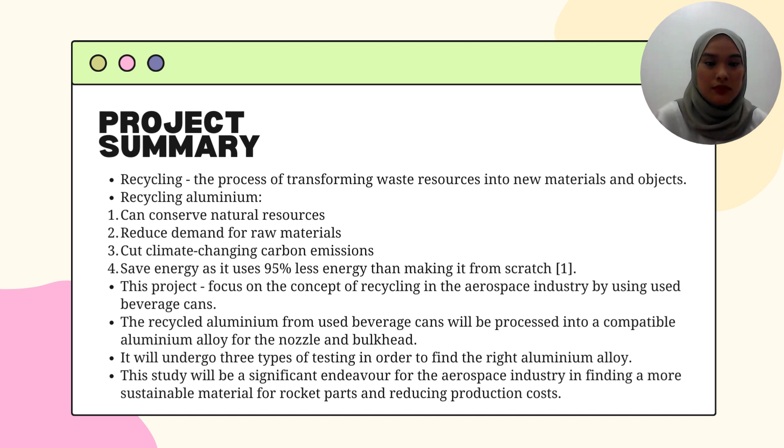Metals is one of the elements that is widely used in the aerospace industry, which is a non-renewable source. Non-renewable metals include copper, tin, lead, aluminium, gold, silver, and other elements. Steel is also manufactured from a non-renewable source, which is iron. Over time, metal demand will increase and supply will be depleted as they are non-renewable resources.

Used beverage cans are a type of aluminium scrap that can be recycled within the whole recycle loop of its original product. It was first developed in America and is now used worldwide. With this, we want to use the same concept for our project.

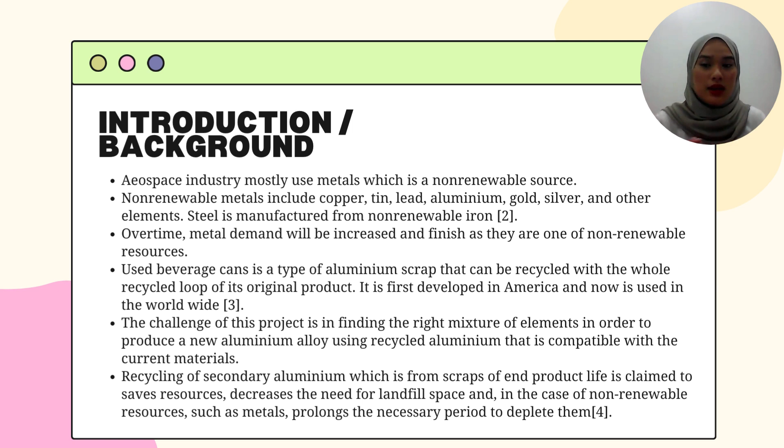The challenge of this project is finding the right mixture of elements in order to produce a new aluminum alloy using recycled aluminum that is compatible with the current material. Recycling of secondary aluminum, from the scrap of end-product life, is claimed to save resources, decrease the need for landfill spaces, and in the case of non-renewable resources such as metal, prolong the necessary period to deplete them.

From the picture attached, we can see that the rocket engine or rocket motor is one of the propulsion systems that exist in rocket parts. It comprises 4 parts: fuel tank and pump, mixing chamber and combustion chamber, nozzle, and cooling pipes. The development of a new aluminum alloy material used for the nozzle and bulkhead will be the focus of this project.

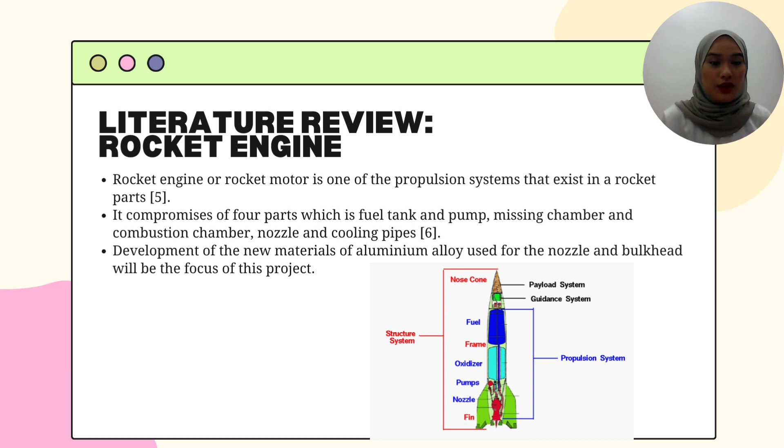Nozzle is a device that accelerates hot exhaust through the combustion reaction of fuel and propellant to create thrust, in accordance with Newton's third law of motion, which states that for every action in nature there is an equal and opposite reaction. A common type of rocket nozzle is the convergent-divergent, or de Laval, nozzle.

The nozzle generating thrust of solid propellant rockets, in particular, is exposed to a high temperature and high pressure environment with erosion caused by combustion gas. When erosion develops on the rocket nozzle throat, it has a significant impact on flight performance, such as reaching distance and flying speed. Therefore, the material used for rocket nozzle is crucial in helping the propulsion of a rocket.

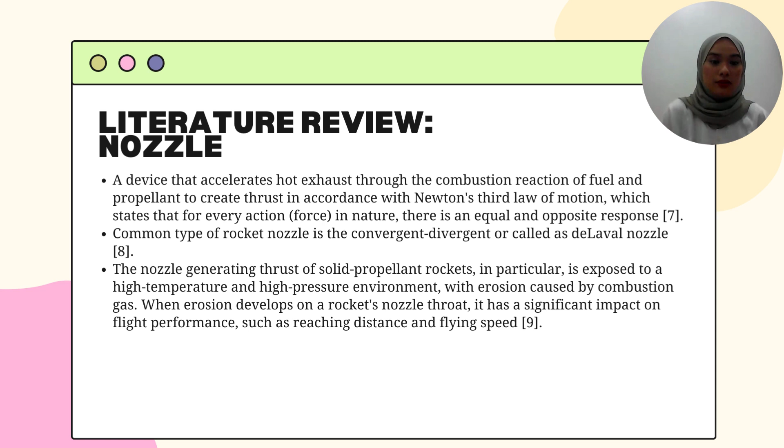Bulkhead is used for the rocket payload bays. It prevents the flow of air through the tube, shielding the delicate payload from the heat of the ejection charge. The tube bulkhead is made to fit the inner diameter of the tube, while the coupler bulkhead is made to fit the inner diameter of the coupler. It can be used together or separately.

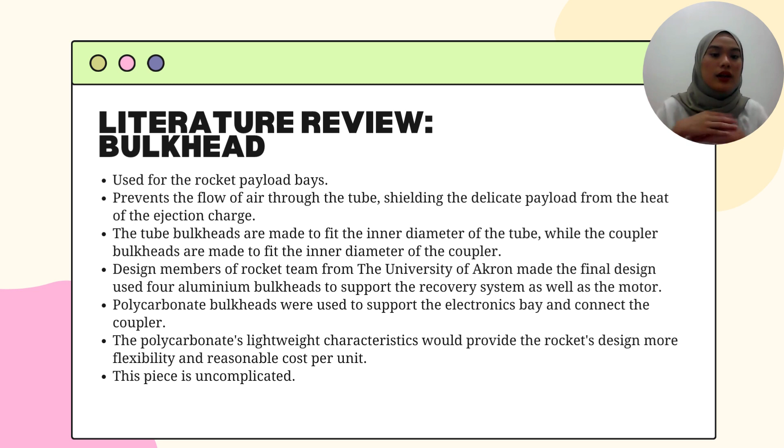The design members of a rocket team from the University of Akron made the final design use 4 aluminum bulkheads to support the recovery system as well as the motor. Polycarbonate bulkheads were used to support the electronics bay and connect the coupler. The polycarbonate's lightweight characteristic provides the rocket design more flexibility and a reasonable cost per unit. This piece is uncomplicated.

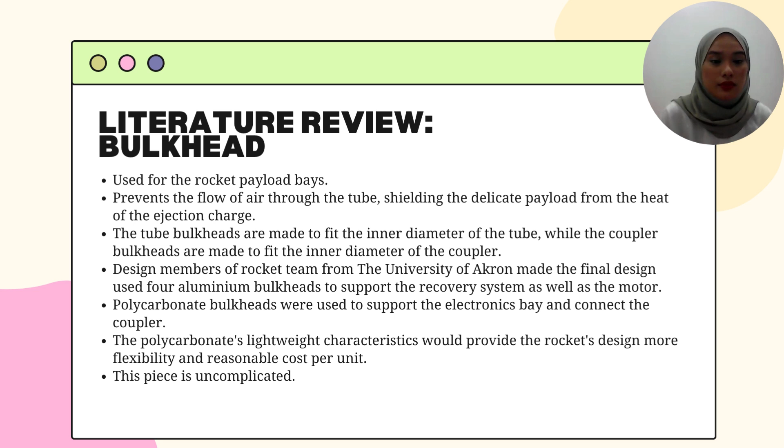Recycled aluminium uses 95% less energy than making it from scratch. Results of an experiment on recycling aluminium cans done by the Department of Industrial Engineering of a Catholic University, along with other Departments of Engineering and Technology, found two crucial points: aluminium loss, or low aluminum yield, and low recycling yield. The tactics of increasing recycling yield, ranging from 4% to 5%, include adding drossing flux, decoating cans prior to melting, and reducing the time cans are exposed to the furnace atmosphere during melting.

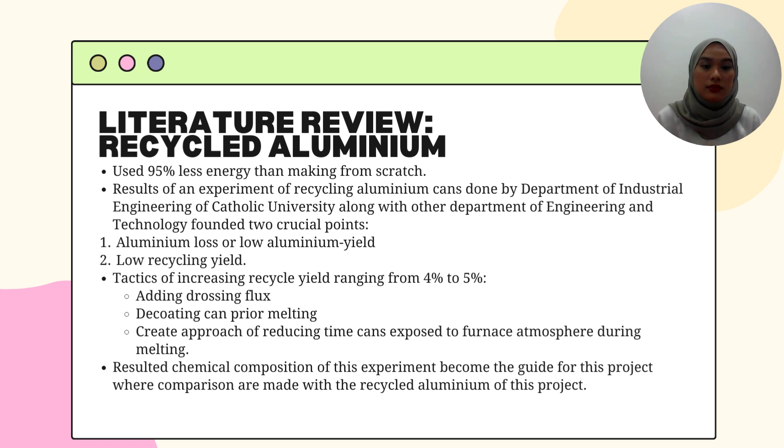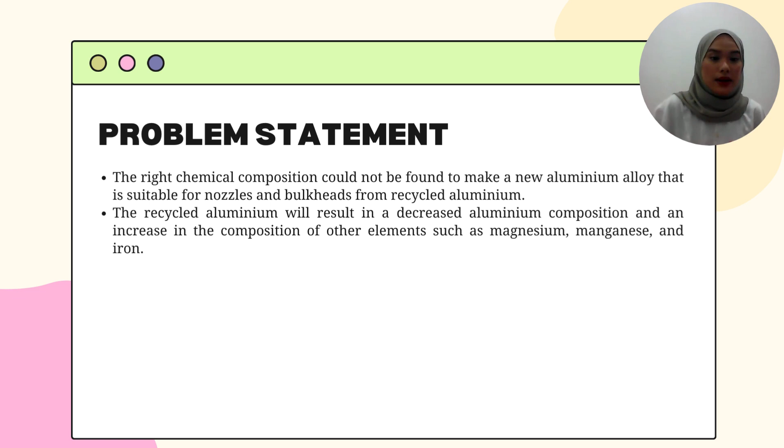The resulted chemical composition of this experiment becomes the guide for this project, where comparisons are made with the recycled aluminium of this project. The problem statement of this project is that the right chemical composition could not be found to make a new aluminum alloy that is suitable for nozzles and bulkheads from recycled aluminum. The recycled aluminum will result in a decreased aluminum composition and an increase in the composition of other elements, such as magnesium, manganese, and iron.

From the problem statement, we found the objectives of our project: first, to analyze the chemical composition of recycled aluminium to produce a compatible and accurate mixture of elements for new aluminium alloy, and second, to determine the melting temperature and strength of the aluminium alloy made from the right composition.

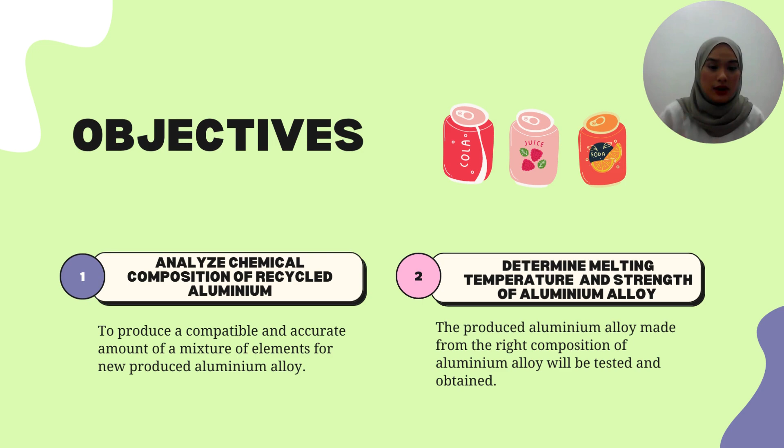The scope of this project is to create a new aluminium alloy using recycled aluminium for nozzle and bulkhead applications in rockets. Three tests will be performed: chemical composition test, melting temperature test, and strength test.

The limitation of this project is that the experiment will take time, as the foundry process of recycled aluminium is a lengthy procedure. This project requires the recycled aluminium and the new aluminium alloy to be produced with a single furnace, so the project's time frame must be carefully managed.

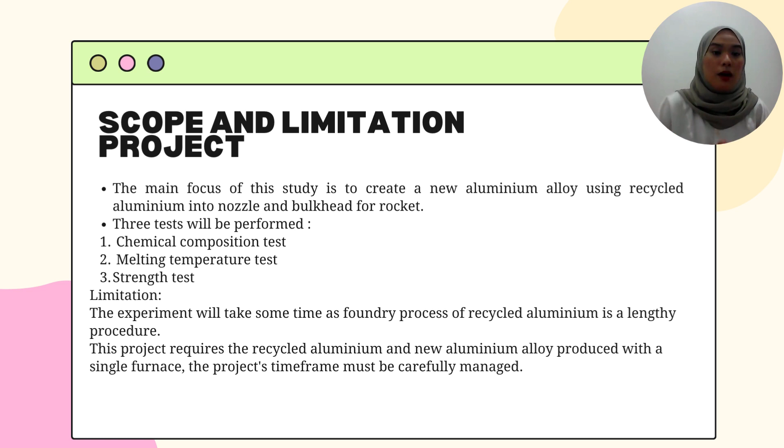After that, we undergo the foundry process for the recycled aluminium and test the chemical composition for the deciding part. If we obtain the right mixture element, we continue with the foundry process of the aluminium alloy with the right mixture, then test the aluminium alloy, and finally obtain our objectives.

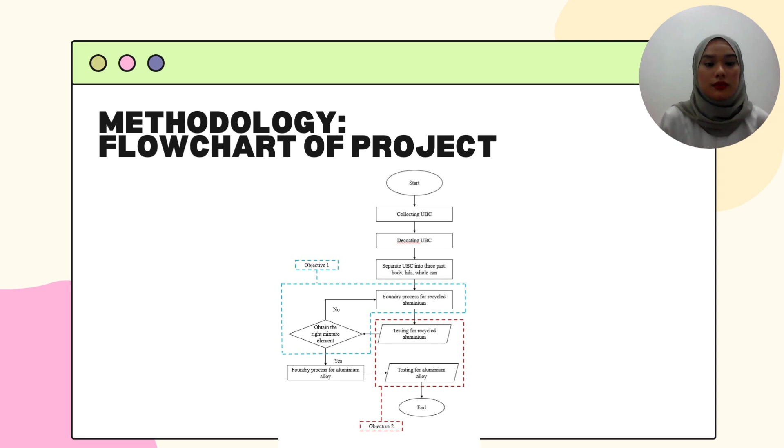From the flow chart, the first three steps are the specimen preparation for this project, starting with the decoating of the used beverage can (UBC). This is done to reduce metal loss and improve scrap value.

The can body and lids are separated after decoating. The can's body is prepared into thin product strips and little pieces to speed up the melting process by shortening the contact time between the can's body and the furnace atmosphere.

For the foundry process, we use a compact crucible melting furnace at 750 degrees Celsius, and the molten aluminium is poured into a cylinder-shaped open mold and allowed to cool. After it hardens, we remove it from the mold.

For the first stage, we will only test the recycled aluminium of different parts, which is the lid, body, and whole can.

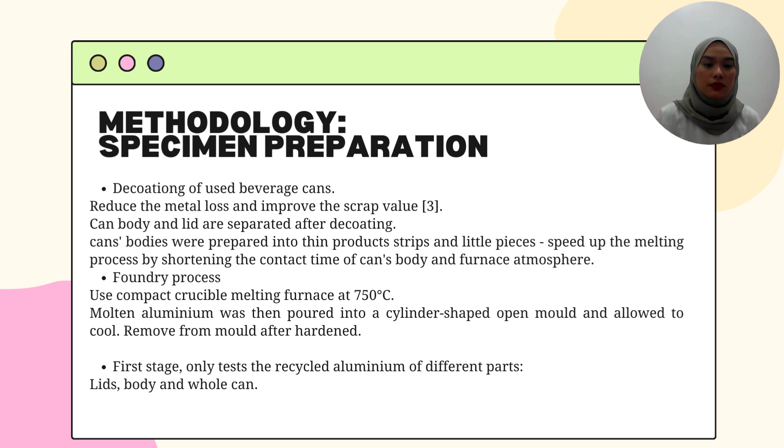Here is shown the specimen preparation that was done: the decoating of the UBC, the separated lids of the UBC, the thin strips and little pieces of the body can, and also the cylinder-shaped open mold and the compact crucible melting furnace.

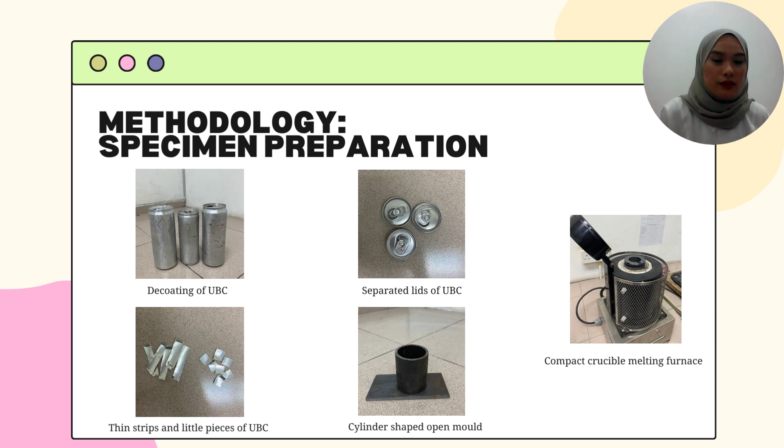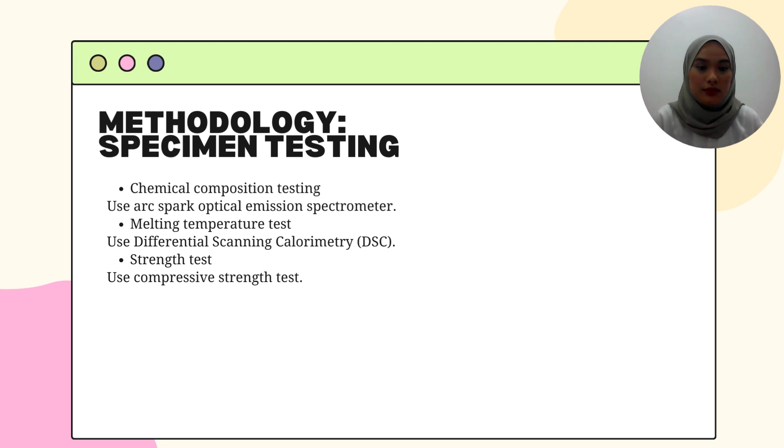After that, specimen testing will be done, which is the three tests we will perform to obtain all the objectives of our project: chemical composition testing using the arc spark optical emission spectrometer, melting temperature test using the differential scanning calorimeter (DSC), and strength test using the compressive strength test.

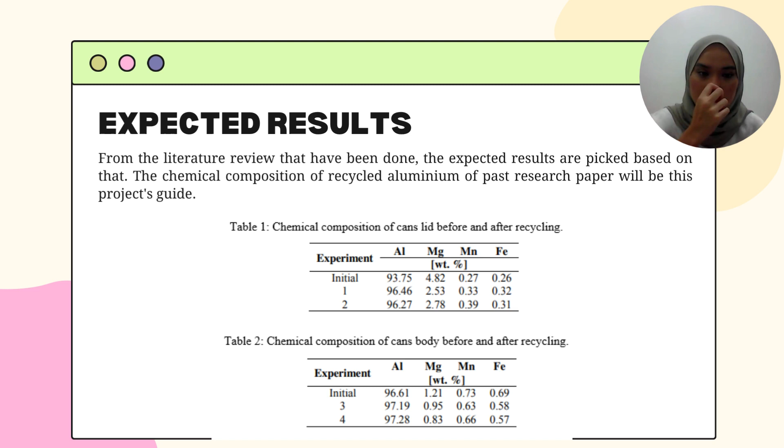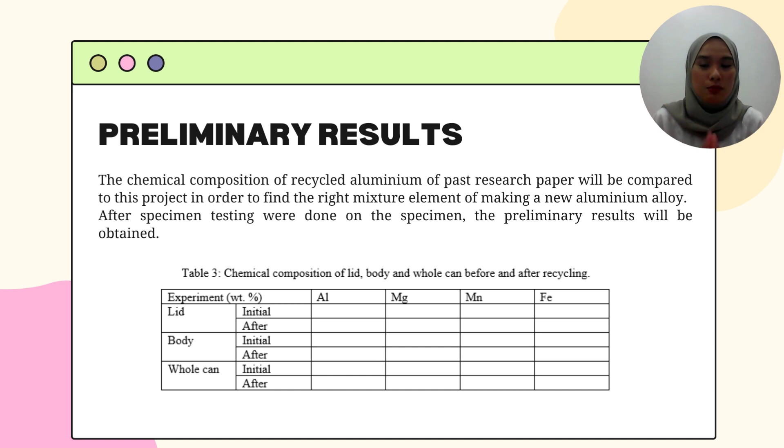However, for FYP1, I could not complete this part, as the apparatus, which is the crucible, is broken. Therefore, this part will be continued in FYP2.

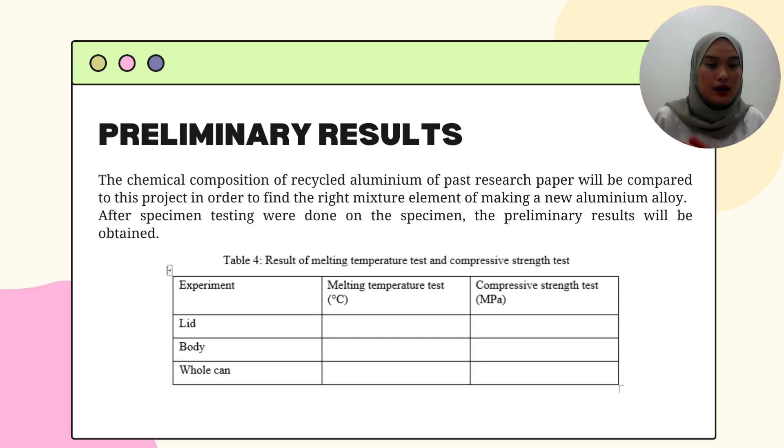After that, we will be testing for the melting temperature test and also the compressive strength test for this project, and with that, we will obtain the objectives of this project.